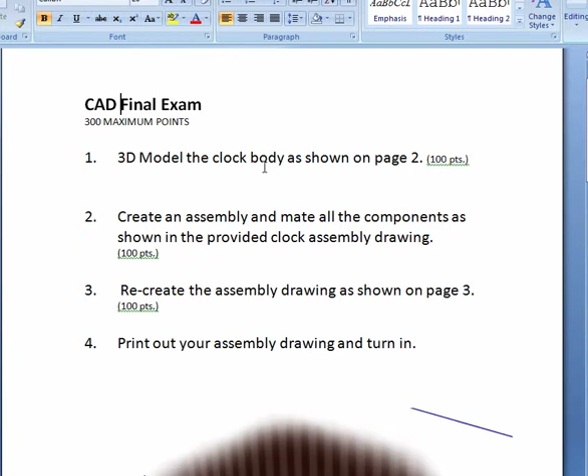This is our final exam. In this exam, basically there's four primary parts to it. The first part is to create a 3D model of a clock body. We'll see that on page 2 here. And you see all the dimensions are given in both manufacturing and engineering standard.

Once you're finished modeling the clock body, save it off. Then the second part is to create an assembly and mate all the components as shown in the clock body assembly drawing. So that's here. You see all the different components that are there. Everything from bolts and hands and all types of things. So anyhow,

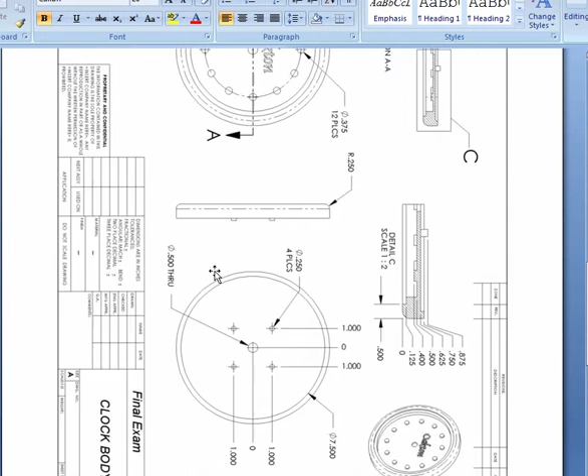then the third part is to recreate the assembly drawing as shown on page 3. So if we go to page 3, that's this drawing right here that we want to recreate. And finally print that out and turn it in. Don't forget your name. So let's get started.

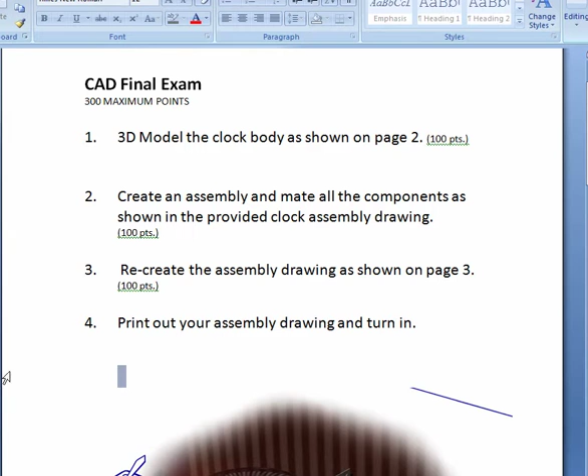With this, we'll first go ahead and start a new part file with ProE. And we could go ahead and select the front plane and start a sketch on it. We'll zoom up pretty close, select our circle tool, and in the drawing, the overall diameter for this is going to be 8 inches. If you take a look here, you can see 8 inches right there. And then there's going to be a thickness of 0.75, and then there's a radius on there as well.

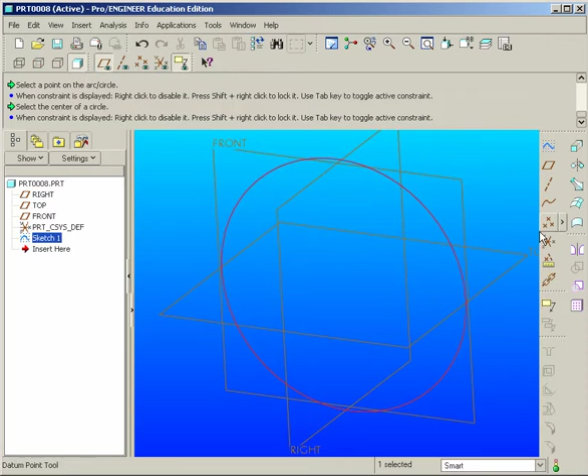So we'll extrude this. We hit done. We go to extrude, 0.75, hit enter 2 times. And it's probably not a bad idea to just put that radius on there, which is a round of 0.25. And select this edge. And now we know what the front is.

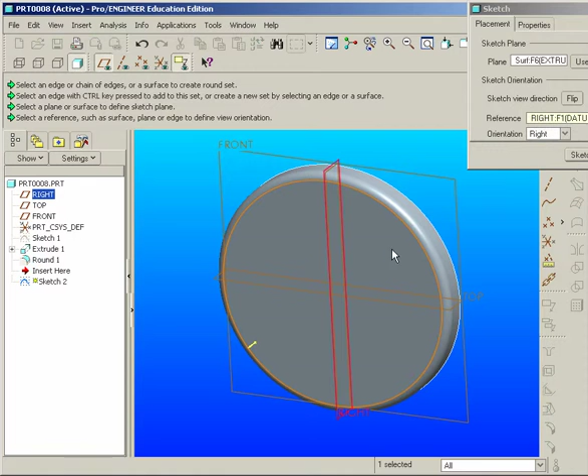We'll start a new sketch on that front surface. And this is going to be a recess, approximately 7 inches in diameter. And then that gets recessed. If we look at the drawing here, 0.125. So hit done, extrude, removing material. Don't forget to select the remove material button. You could flip the arrow and it's 0.125 and hit apply.

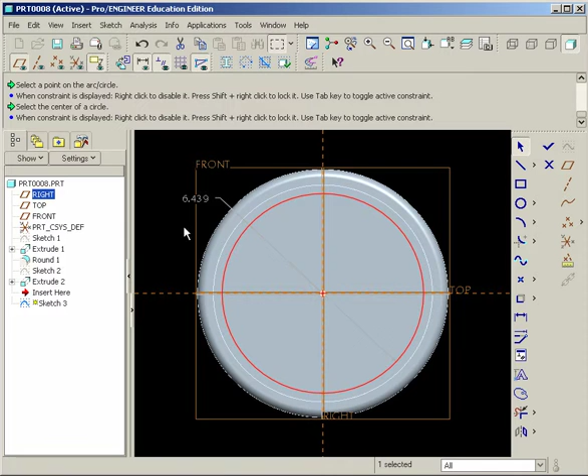Now we make another recess. We could select this face right here. Selecting the very front face, and you'll see there's a little bit of a benefit there. Eliminates us having to do any sort of math calculations, which might result in some sort of error in dimensioning. So this is going to be 6.5, and that's going to get extruded as well.

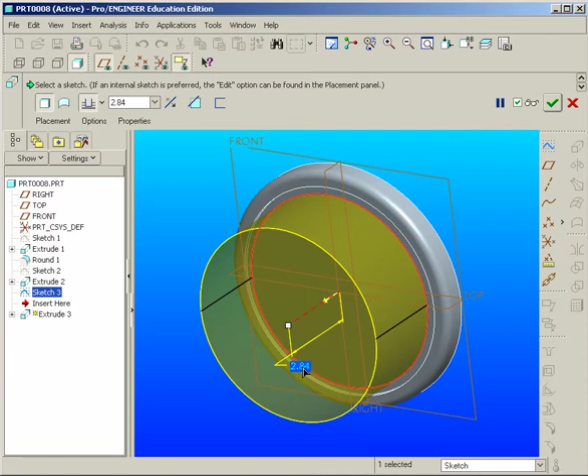If we look at the print, go from the 0 marker here, this goes all the way down to this line at the very bottom. If we follow that up, that's a 1/2 inch. So we'll set to 0.5 and flip the arrow. And make sure you hit remove material. Hit apply.

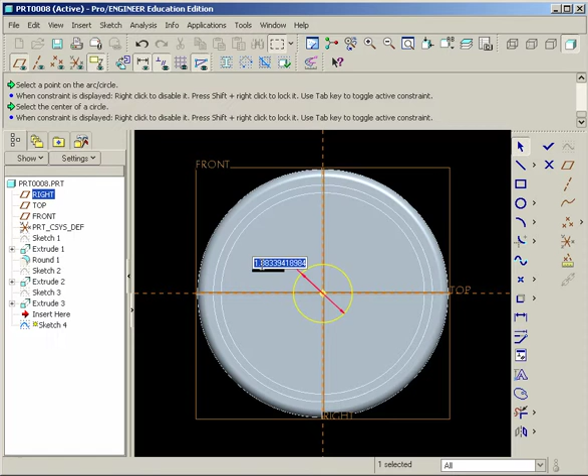Alright, there's also a through hole in here, so we could just select that face and start a sketch. And draw our through hole, which I believe is going to be just 0.5. And go to extrude, flip it, and cut it. And you can select through all.

Now the reverse side gets some features on it too, so we have to flip it around to the back. Start a sketch on it. And there's a circle that we have to draw. And it gets dimensioned here 7.5. And then that's a cut. So we go to extrude, flip the arrows, and that's 0.125.

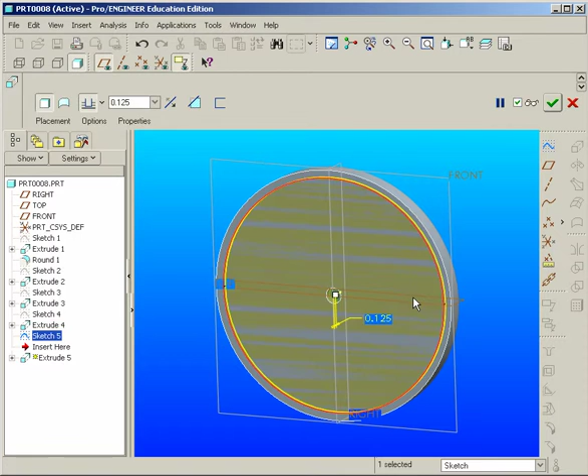And in this case, I didn't see anything update. As a matter of fact, it filled in my hole. Problem is I forgot to select the remove button. So if that happens, it's a very easy fix. Just right click on the feature, edit the definition, and select the remove material button. And there it is.

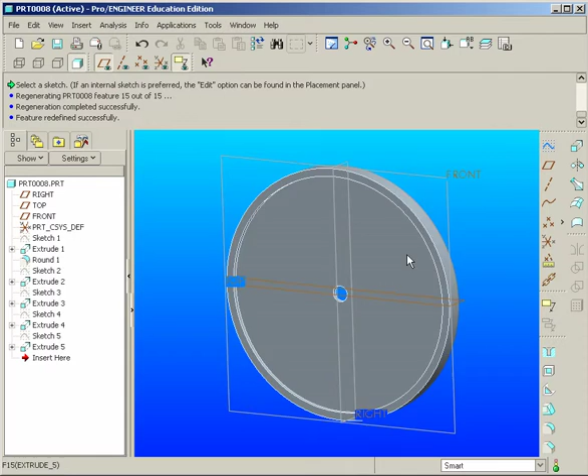Okay, we'll start putting some of the features on the back side here. We'll start a sketch on that surface, and we'll go to the centerline tool and just draw a vertical and a horizontal centerline. We'll take a circle tool, draw a circle out here. This is going to be 0.25 in diameter, and these are dimensioned 1 inch vertically and horizontally off of those center lines.

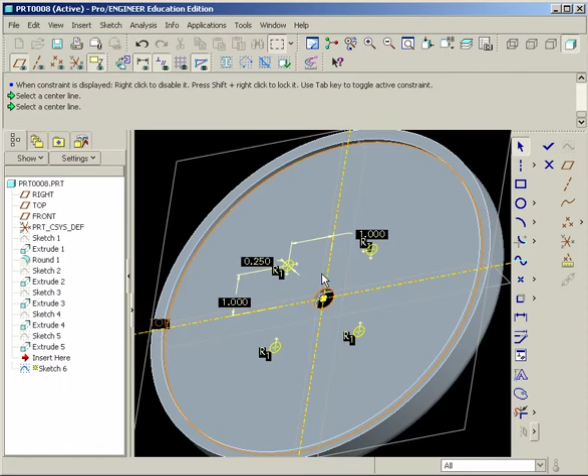And as long as you drew center lines in, which is right over here, make sure you select the center line, you should be able to do the mirror tool right now. So if you select the actual feature, over here on the lower right, you'll find the mirror. Select mirror and select the vertical center line, or horizontal for that matter, it doesn't really matter which order you go in. Now hold control and select both so they're red. Go to mirror again and select the opposite, perpendicular to that. And now you should have four circles, which we're going to create bosses from.

So we now go to extrude, 0.25, and the backside is done. Make sure you use the mirror tool for that. I'm going to be checking that one.

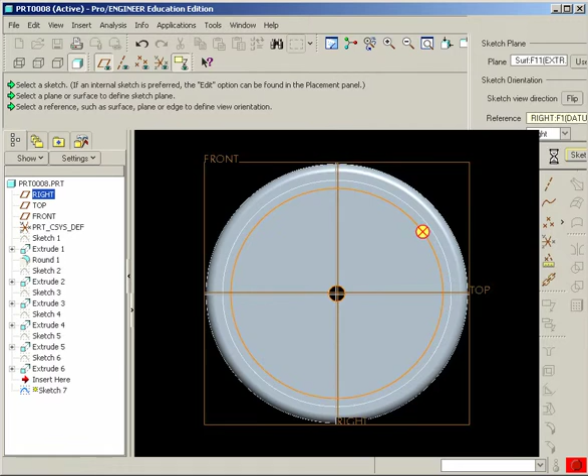Okay, now we'll select this face, start a sketch, and we're going to draw the 12 indicators on here. And diameter is 0.5, and it should be 2.5 for the location off of the center. If we look here, I have it shown as a diameter, which is 5 inches, so 2.5 would be the radius, which is half that.

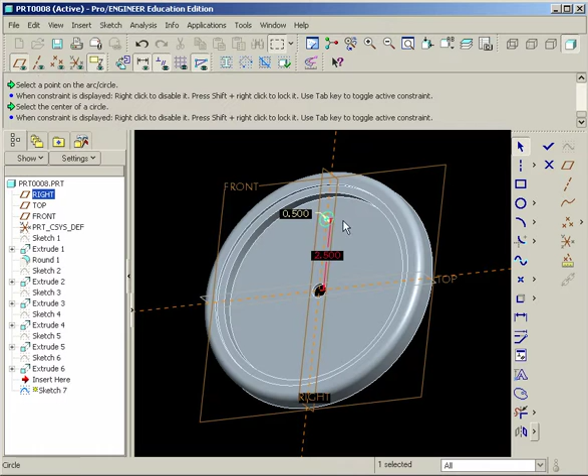And these are only 0.375 for the circles. My mistake. Let's change that. And now we'll hit done, extrude, 0.125. And now we need to pattern that with a circular pattern. The key to the circular pattern is this tool, the axis display. Make sure you also have your feature selected, like here, it's shown in red, and find the pattern tool.

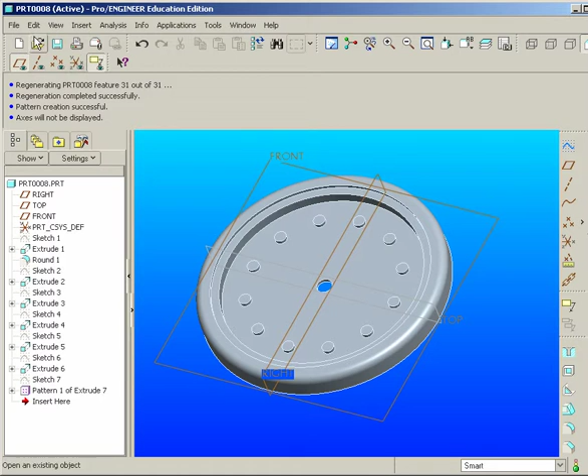Select axis, select the center axis right in the middle here, and be sure to put in 12 instances, and you can put in 360 divided by 12, which gives you 30 degrees, and hit apply. You could turn off the axis display. And there is our clock body, 100 points. We'll go ahead and we'll save that. And I'll save that as my, make sure you don't put any spaces in.

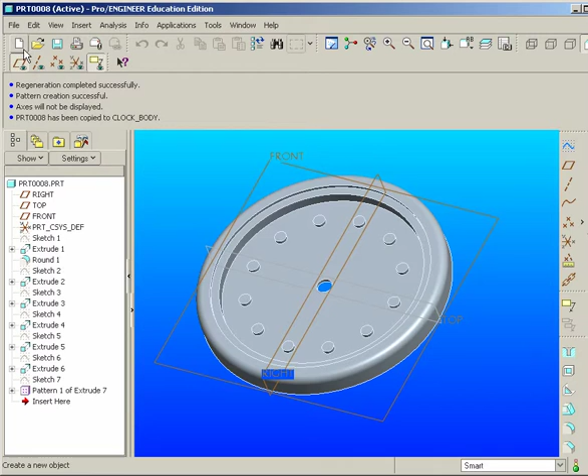Now we're ready to move on to the assembly. So let's go to New, Assembly, and we'll call this the clock assembly. Let me downsize it to the screen. You, of course, won't have to do this, most likely. All right, and we could go over here to insert a part. We go to Assemble. We find the clock body, hit open, and over here we'll go to the coordinate system and lock it in through that.

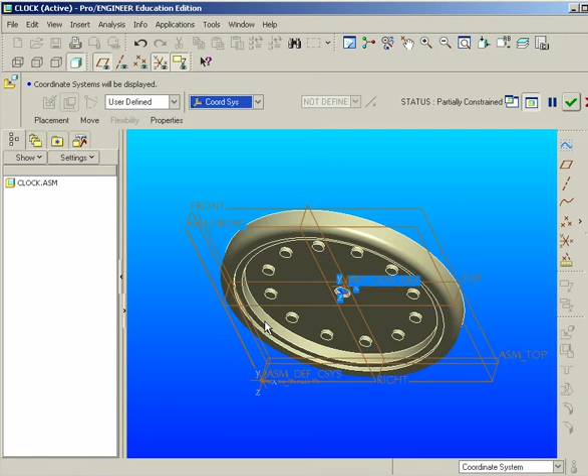So if we go to coordinates, we can now select the part coordinate system to the assembly coordinate system, or CSYS as it's shown. Hit apply. And we could begin to insert additional parts here. We could turn off our planes and even our coordinate system if we want, just so we could see this a little bit better.

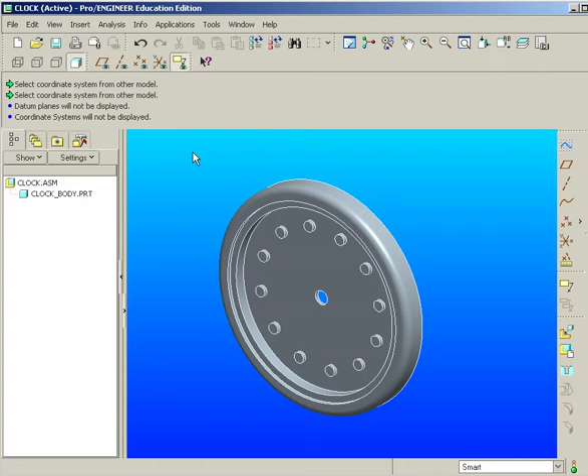And now to insert the new parts, go to Assemble, and it will be under your directory for your class. Go to Sample Files, and you'll find the final, and all the parts should be here. Next part you want to bring in probably is the chrono housing. Hit open, and we'll first get this face here aligned into the center hole.

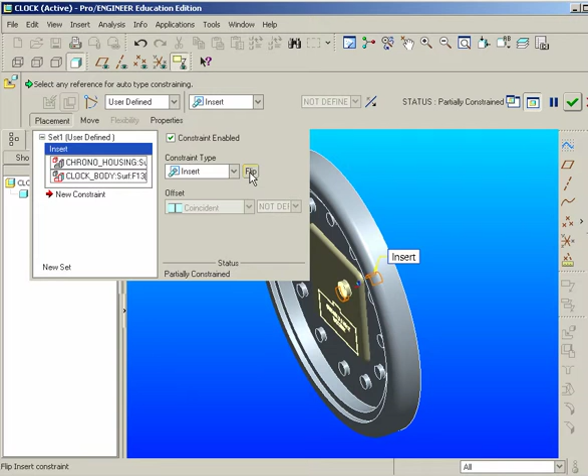Okay, we can see it's flipped around a bit. There's a nice little option here which will allow us to reverse that. We could actually go to placement here, and we could flip it. But the problem is with that, sometimes it flips it upside down. But that's okay. We'll go ahead and just leave it at that. We could actually middle click on it, and we'll go to Move Component. We can actually move it out a little bit if we want to see it better.

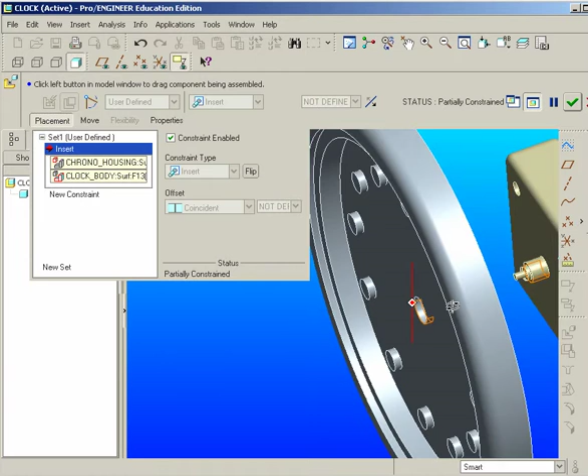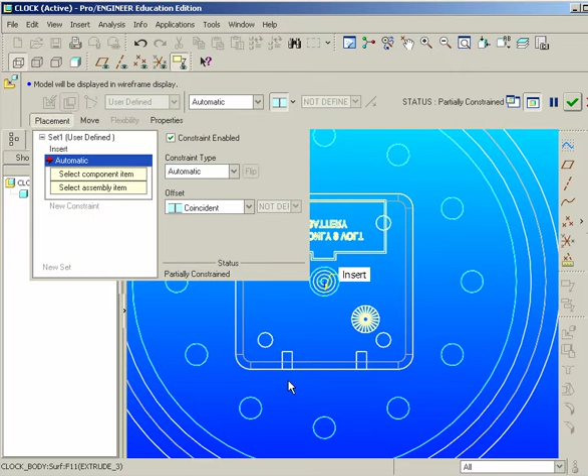And we'll go to New Constraint. And so basically right now, since it's upside down, the way we could tell that if we go over here to our views, go to the front view, and especially if you see it in wireframe, you should be able to identify that it has to be flipped the opposite way, because these little holes here are for the bracket for mounting it on the wall. So let's go back to shaded. We'll fix that in just a moment.

The way we could fix that is just to select the opposite holes. So we could select this hole here to this opposite end, and if it gives us a little bit of a problem with flipping it, and actually in this case it flipped it for us, we're in good shape. We'll go with one more new constraint. We'll select this face here to that face and hit done.

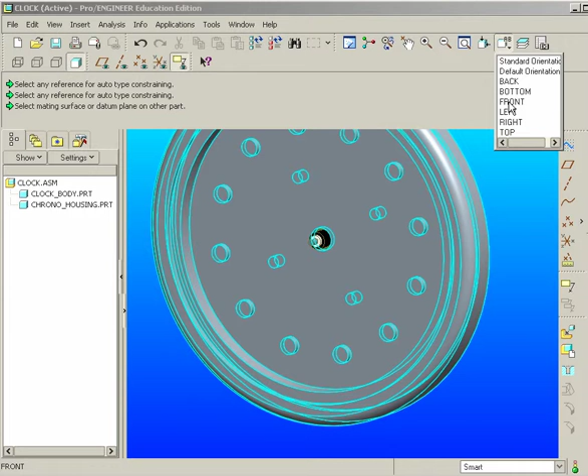And now if we go to the front view orientation under the AB button here and change it to wireframe, we should be able to see that those two holes there for the bolts are going to be on the top, which is what we need.

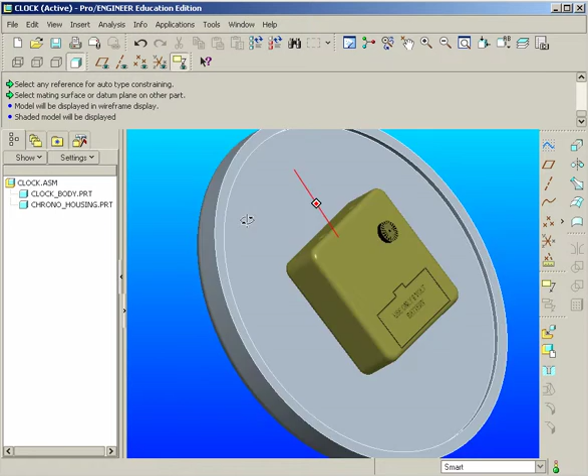Okay, we'll go back to shaded mode. Now we'll go ahead and insert some of the additional parts here. So we go over here to Assemble, and we'll go ahead and drop in the hour hand. And here we can see it. We'll select this face here, and that gets mounted to the white surface.

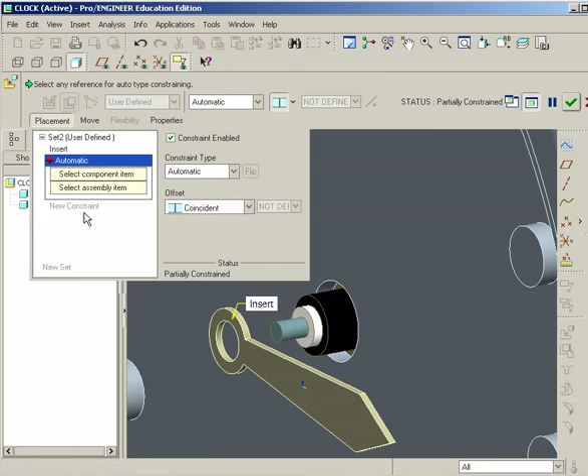Okay. And unfortunately, it's way over here, flipped on the other side. So that's not a problem. If you want to move it, just right-click over it, and you'll find Move Component. And now you could grab it and just move it forward, and click to drop it with the left mouse button. Go to Placement now, and go to New Constraint, and we'll go ahead and select it to be mounted.

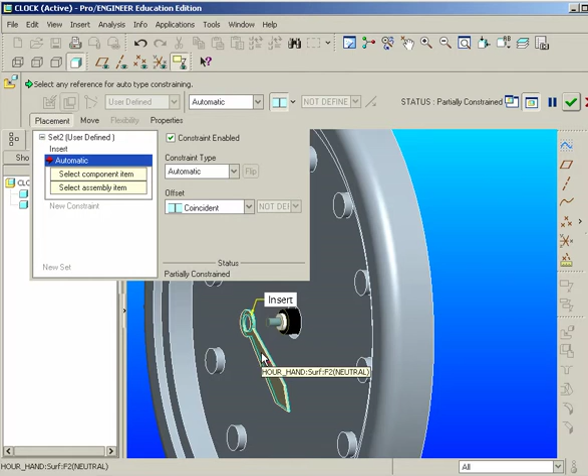Let's see here. Flip it around. And we might have to move it a little bit more. Right click, or we could right click and it'll select the backside face for us just by hitting next. And then left click. And then select the black surface here. And that's it. Hit apply. If it moves, that's okay.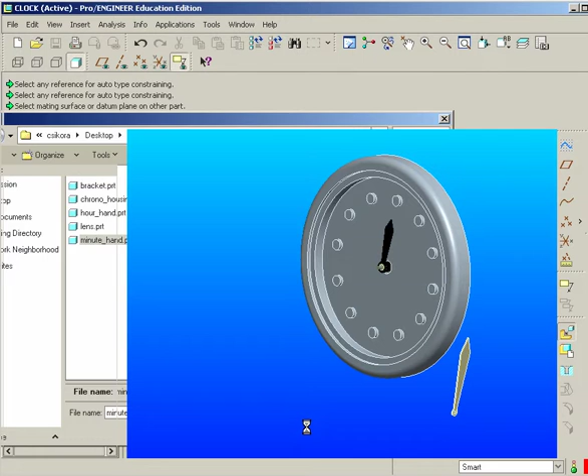Alright, we'll go ahead and insert another part here. So this time we'll drop in the minute hand. And let's right click on it and move it right in the front, closer to where we want it, so we won't have that same issue. We could go to Placement, select this face here, to the silver face, and as you can see, it's a little bit easier this time. We could actually flip it around, select that backside face, rotate it, and select the white surface here to mount it.

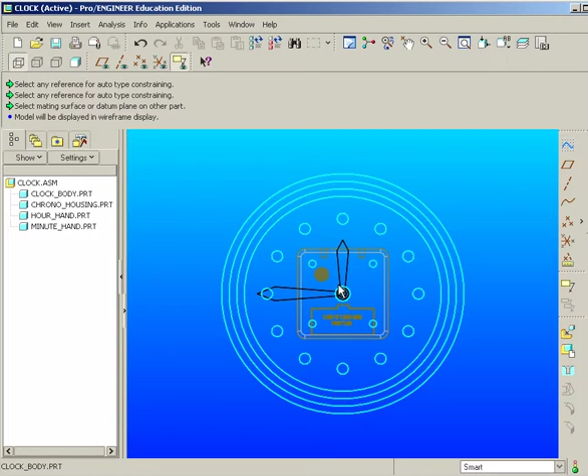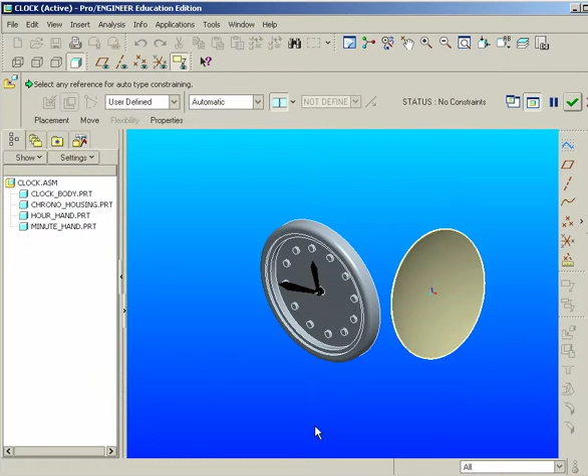We'll put the lens in. And to put the lens in, we just go over here to Assemble, and we select the lens. Again, right click over it, and you'll find Move Component. Let's bring it way over here. Click with the left mouse button.

And then go to Placement, select that flat face there. There's a little flat. And you want to mount that on this face here. And then you can select the cylindrical face there and mount it on that cylindrical face and hit apply.

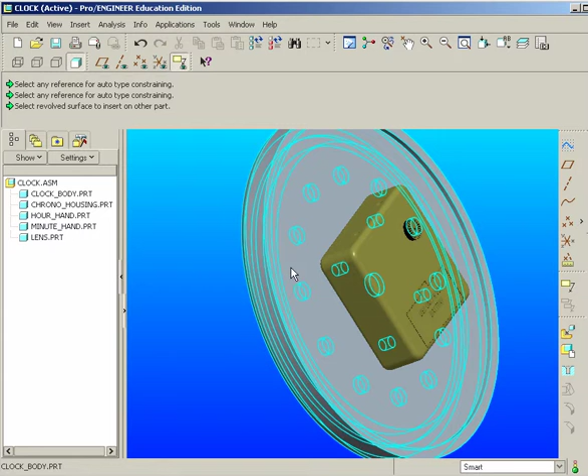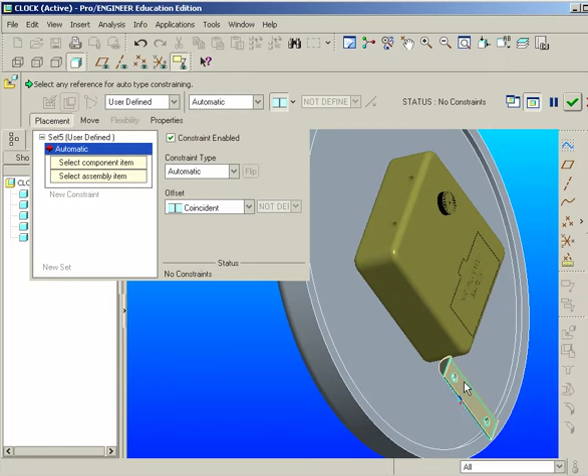Okay, now we just have to put the bracket on with the bolts. So we go to Insert and select the bracket, hit Open. The bracket's over here. Again, it's not a bad idea to right click on it, move component, and drag it over here. Go to Placement, and now, actually let's bring it up a little bit. Right click on it, move component. Let's move it up closer where we want it.

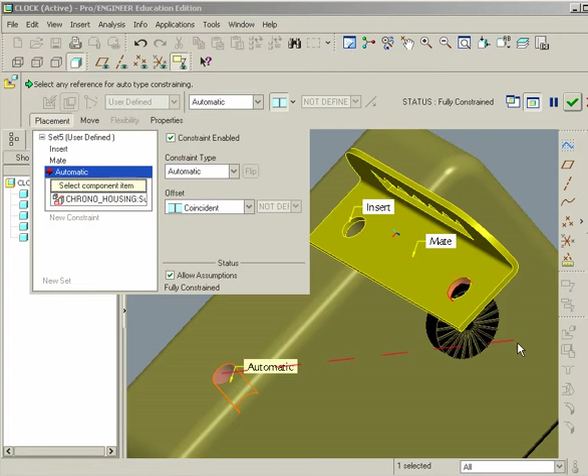And then click on the Select Component here. We'll select this hole. Let's see, it's the backside face, so we want it actually on this hole right here. Okay. And then we'll select this underside face to lock it into this face. And then we could actually mate up the holes again over here. Oh, I should have actually selected new constraint. Let's try it here. And apply.

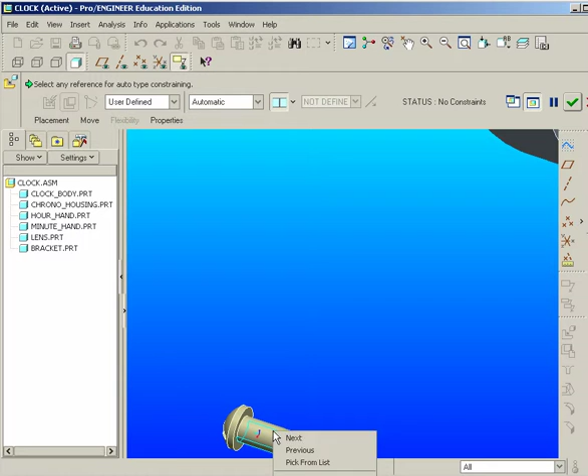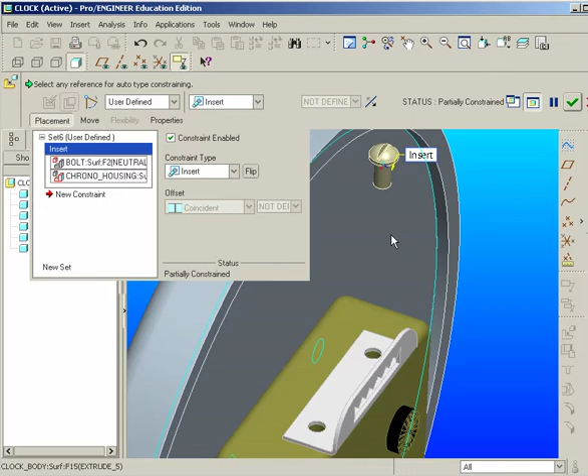All right, and finally, the bolts. Bring in one, and we'll right click on it to move the component. Grab it with the left mouse button, bring it closer where you might want it. Actually, we could drag it up further. And we'll go to Placement, click in the box, select the length of the shaft here to one of the holes, and then flip it around, select the underside face to the top face of the bracket. Hit Apply or middle click.

Let's bring in another one. Again, bolt. And it's remembering our last mates. It's supposed to be a nice feature. For our class, let's just go to manual here, place manually to override that. It's like an automatic feature. It's supposed to make things work a little bit faster, but let's skip it.

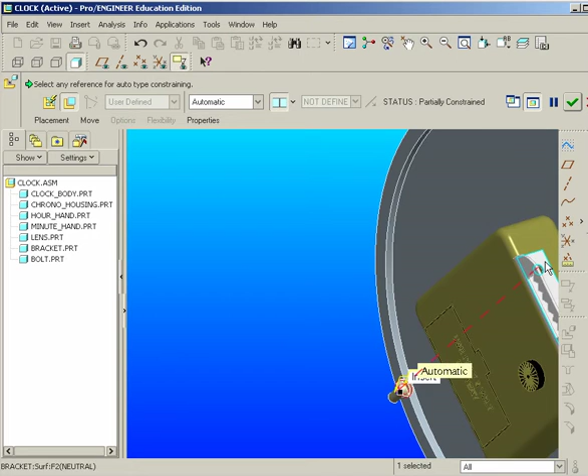And we'll go over here, select that, and then select this underside face. We'll have it go right through the part to grab the top face of that bracket and hit apply. Okay, that's it. We'll go ahead and save that off.

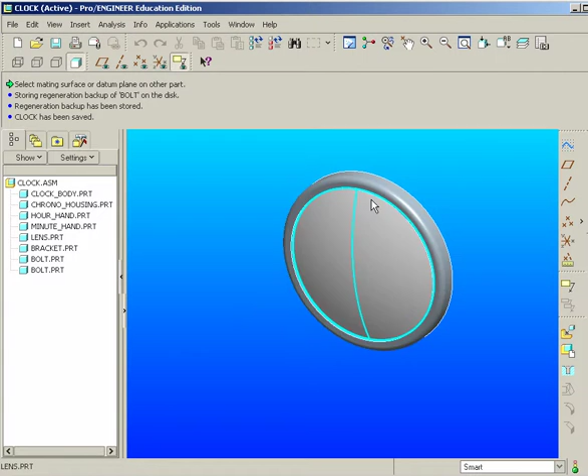And now we're going to explode it. So we could go to View, Explode, and Edit Position. Now it's going to automatically explode it partially for us. We might want to actually add to it a little bit, enhance how it's laid out a little bit better. And the way you can do this is you can select the component. And if we turn on axes, it might be easier. We could actually select an axis.

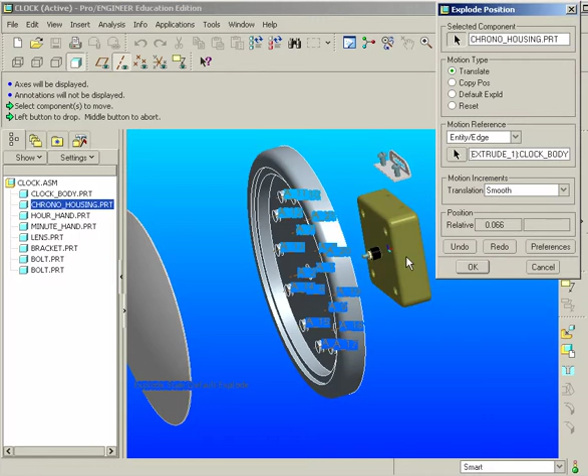In this case, the center axis does pretty well. And then we select the component that we want to move. So if we want to move this, just click on it, drag it out the back, and then we could hit OK. And actually, we should go back there. Go back to View, Explode, Edit Position, and let's move some more of these.

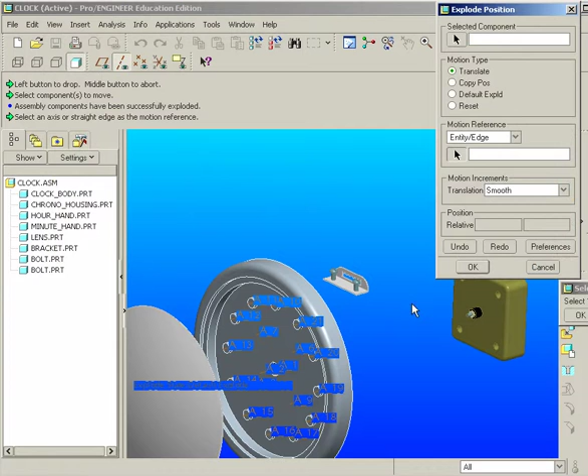So Motion Reference. We could go ahead and select that axis, select the part that we want to move, and you could actually put incremental values in here if you're watching it. In this class, I'm going to let you kind of eyeball it, but in real life, you might want to actually put an incremental value. Like if this moves 7 inches, make sure that the bolts move 7 inches so they're all in alignment properly. So we're at 7.42.

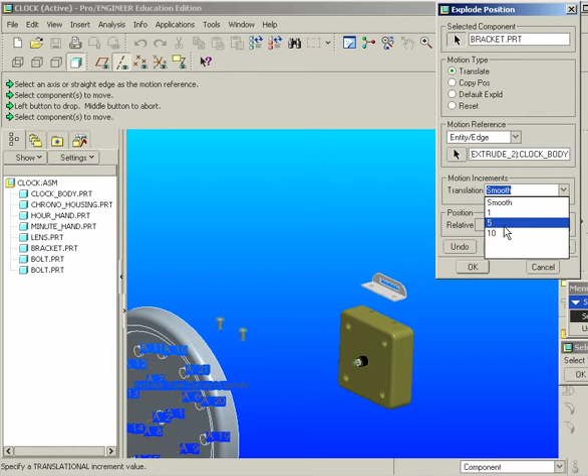And we could go ahead and over here, instead of smooth, we could put in specific values too. So we could go to five, hit OK. And we could go ahead and do the rest. So let's keep going with that. View, Explode, Edit Position.

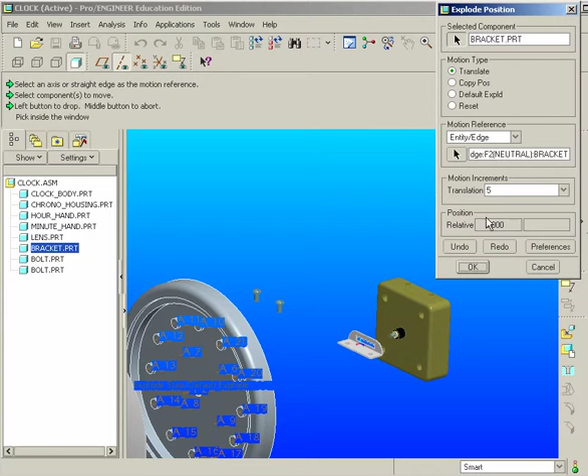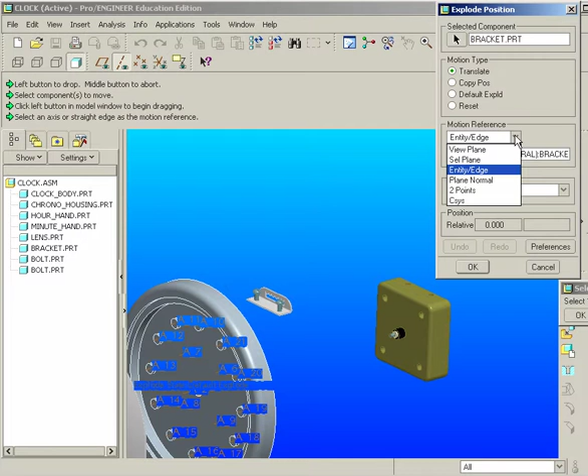Okay. And for this, again, we'll go ahead and make sure we select the right things. So translational or motion increment, we'll select the component. And actually, we'll just do smooth here. Move back. All right, I'm having a little bit of a challenge here with it. Apparently my motion reference, I have it set to something that I didn't want. So let's go ahead and make sure we have it set to one of these axes.

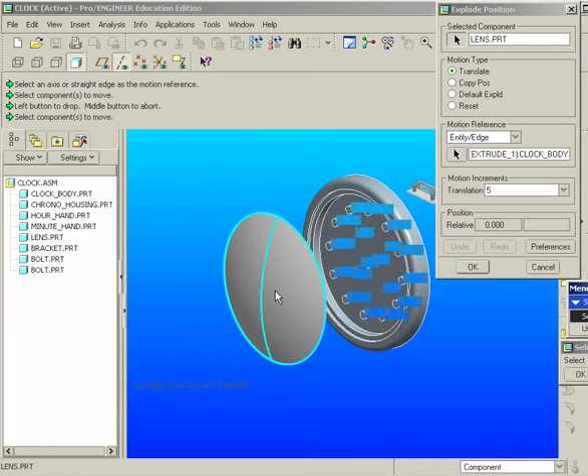And we could go ahead and move it. And here it's incremental. This is more what you want to do. Like we'll click on 10 inches for that. So basically, you just keep going through there. We'll do one more. Go to View, Explode, Edit Position. And we'll grab another axis. And then the component, let's move this forward. Okay.

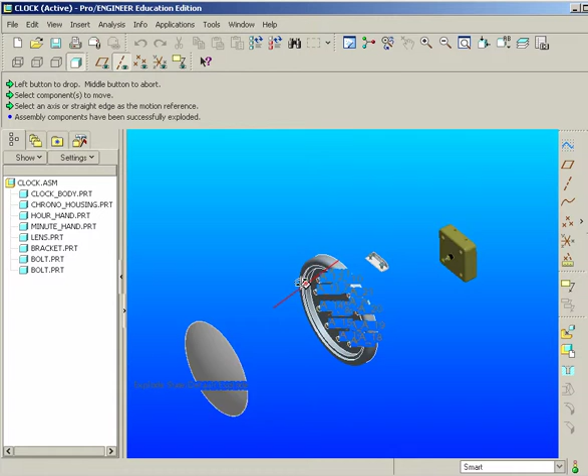And now we'll go ahead, and I'll actually have to work on this a little bit better. Actually, let's collapse it. Go to View, Explode, Unexplode View. This will bring it back if it disappears. You can turn off your axes. And now let's move on to the drawing.

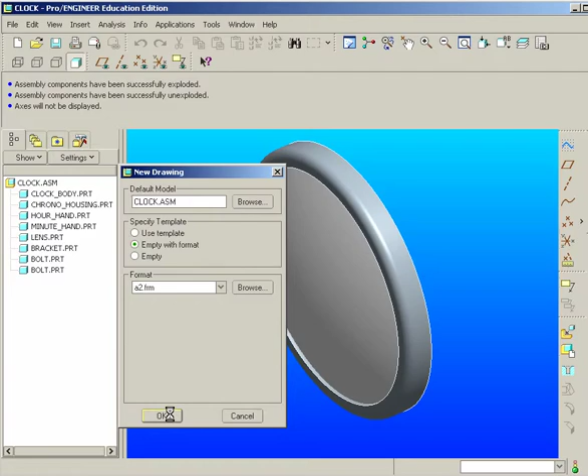So go to New, Drawing, turn off Use Default, Empty with Format. Make sure the clock assembly is selected. If not, hit Browse, find it. Go to Browse. We'll use the A size. Unfortunately, I don't have an A standard here. Maybe we could use this one. A2 sounds like it's an ISO template, but it should be okay. Hit OK. Your templates are a little different on your computer. Just select the A size and that'll be fine. Doesn't have to look just like mine.

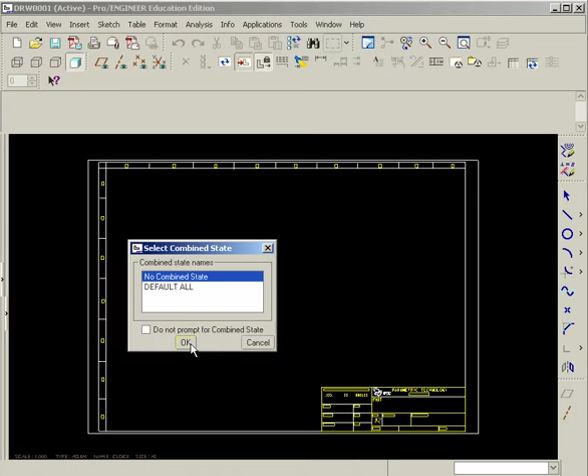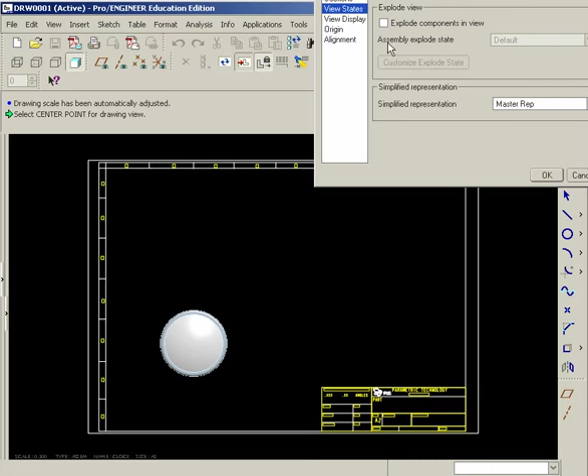Okay, now I could go ahead and click on this icon here to insert a general view. Left click. I'm going to go to the front view orientation. If we look at the actual print, you have to try and match this as close as possible. You'll see that hidden lines are visible. So under View Display, make sure we have center lines set for tangent edges and hidden lines are visible. Hit Apply. And then we're going to hit Close and we'll move this. So be sure to unlock it, relocate it.

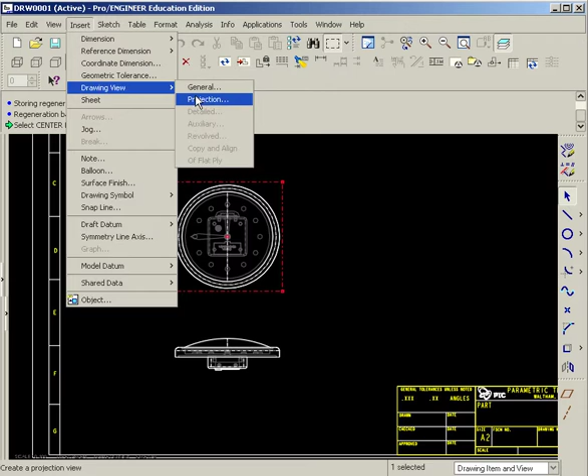And we'll go to Insert, Drawing View, Projection. Have a bottom view. Double click on that. Make sure under View Display, that one will be hidden lines as well, and center lines. And then we'll make another one. Select this view, go to Insert, Drawing View, Projection, make a left side. Under View Display, same thing. Hidden lines, center line, hit OK.

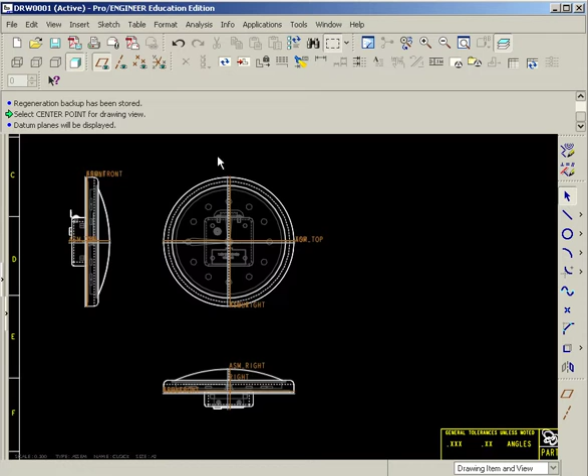Now we need to make a section view. So for the section view, as long as you lined everything up in the center, we should be able to turn on our planes and see our assembly right plane. So now we could go to Insert, Drawing View, Projection, select our front view, drag off one to the right, double click, and over here under Section, select 2D cross section, hit the plus symbol, hit Enter, give it a name A, hit Enter again, and I'll just select the assembly right plane and hit OK.

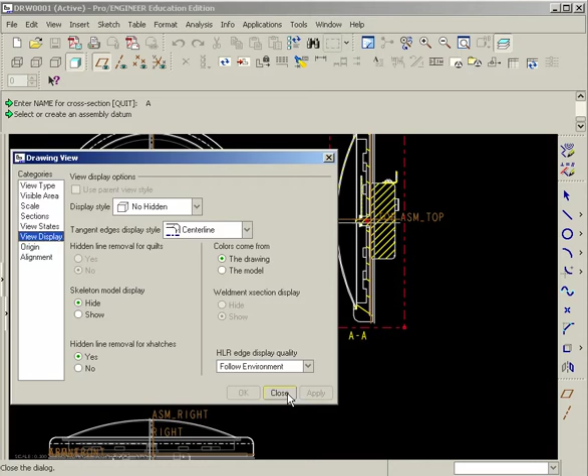Now for this one, be sure that you have it set up and it should look exactly like the print. That means that under View Display, we want no hidden lines and center lines for the tangent edge display. And you could turn off your planes again. So it should look just like that. If I see hidden lines, it gets marked off.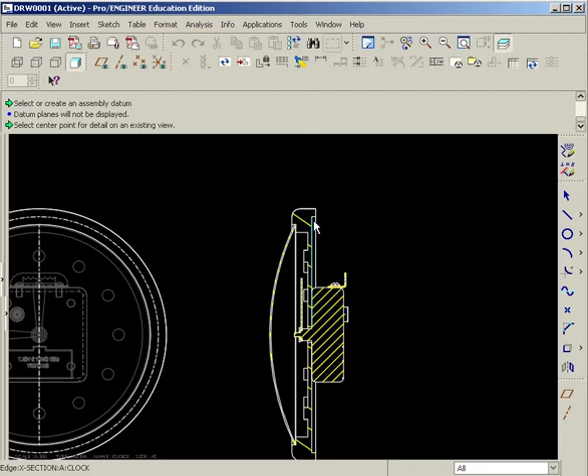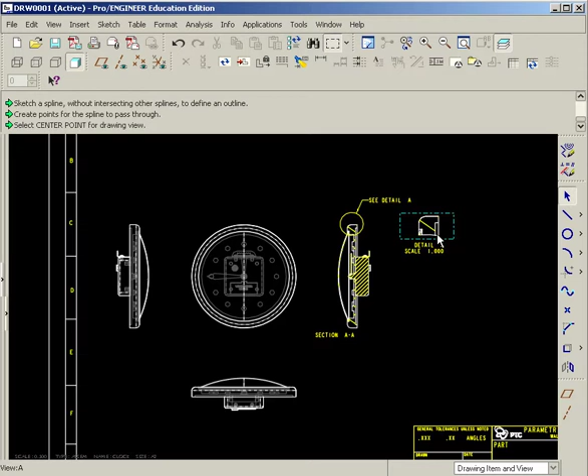Okay, the next view is a detail view. So we go to Insert, Drawing View, Detail View. Make sure no view is selected before you do this, or else it'll be grayed out. Click in this vicinity here, and then drag a circle around it. Middle click, left click to drop it. Make sure that you lay this out nicely and align the detail view information as such. Okay, we might have to squeeze some of that together so we can make room for our isometric view. So make sure you drag some of these things over.

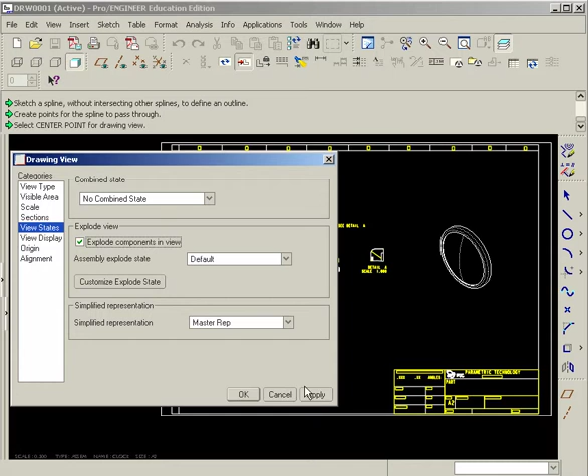Now for the isometric view, we'll right click the area, insert general view, hit OK, left click to drop it in. Make sure this is set to isometric, hit apply. Under view display, make sure no hidden lines are turned on. You want center lines for the tangent edges, hit apply. Finally, go to view state and explode, hit apply, and close.

Now it didn't seem to remember what I had. That's okay, just use what we have here. We'll go into more detail with exploding next class. It's just a little too complex right now for an introductory class.

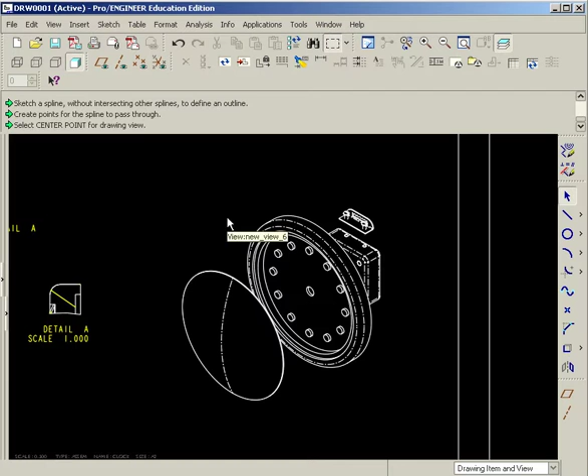So at this point we're going to insert the balloons. We'll go to Insert Balloons and do it the manual method. The next level class covers how to do this automatically, just a little more than I want to cover right now. But we'll hit with leader, make note.

From here we could select an edge of the part we want, middle click. This will be the bracket, part 1. Hit enter. Hit make note, click on this part, middle click, make that part 2, hit enter.

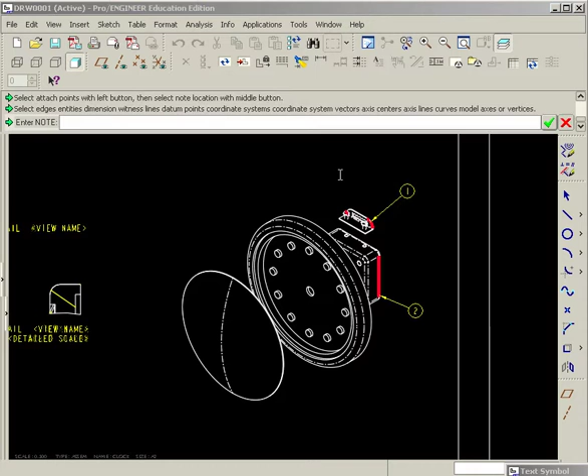Make note, we'll select one of the bolts, middle click, that'll be part 3, hit enter. Hit make note again, select the clock bezel, middle click, that will be part 4, hit enter twice. Make note, select the edge of the lens, middle click, that'll be part 5, hit enter.

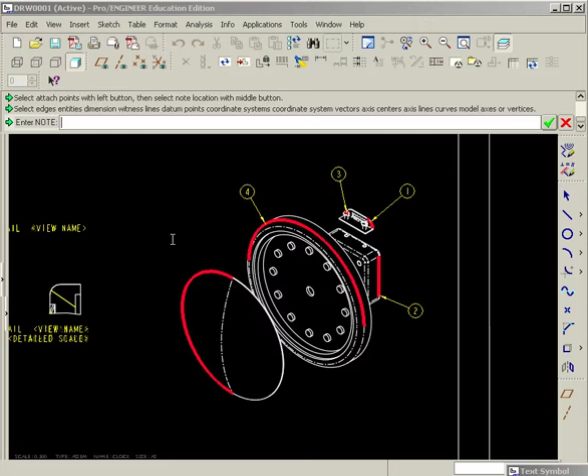And the hands aren't showing up because they're behind the clock bezel. That's okay, just hit done and return.

Okay, from here now we're going to drop in our bill of materials. Again, we're not going to use the automatic method. We'll go over here to table.

Select here, will be 5 by 12 by 5, middle click, 1, 2, 3, 4, 5, 6. Oh, should have put something in there. Let me hit cancel, and hit quit. We'll put those in again. I went a little too fast.

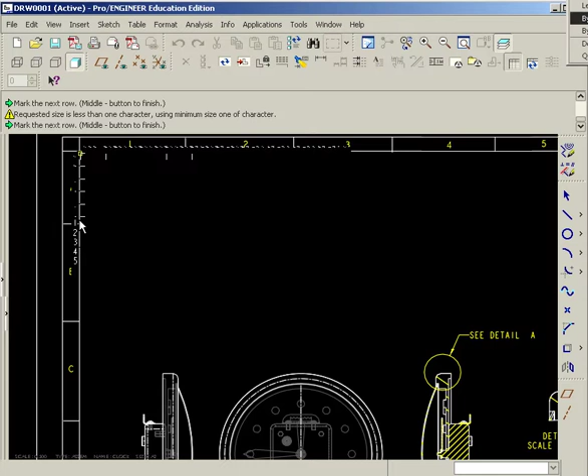So left click, 5, 12, 5, middle click, 1, 2, 3, 4, 5, 6. Then the first cell we'll make it part. Second cell will be description. Third cell will be quantity, QTY, period.

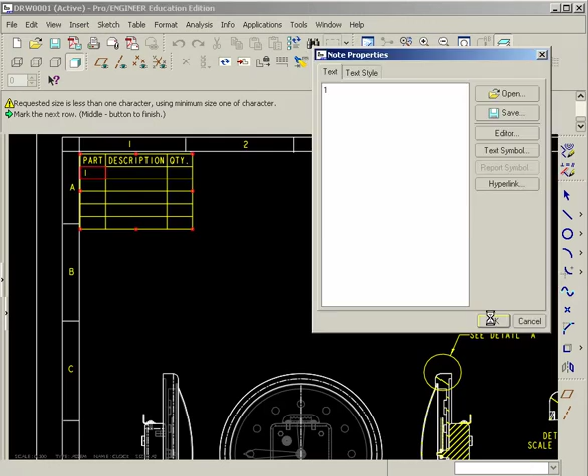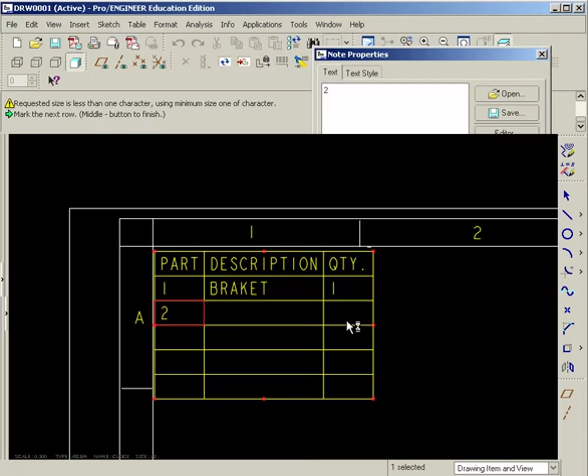First part here is number 1, and if we look at that part, that was the bracket, and quantity of 1. The next thing was number 2, that's the chrono, so we'll double click in there, type in 2. Just call it the chrono housing, I didn't make enough room to put all that in there. That'll be a quantity of 1.

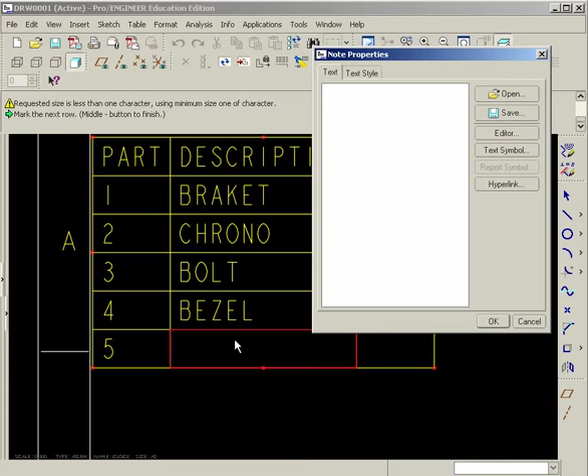Number 3, I believe, is the bolt, and that has a quantity of 2. Number 4, we can middle click, actually move over here, it takes too long there. So for number 4, that's the actual clock bezel, quantity of 1. And number 5 is the lens, quantity of 1.

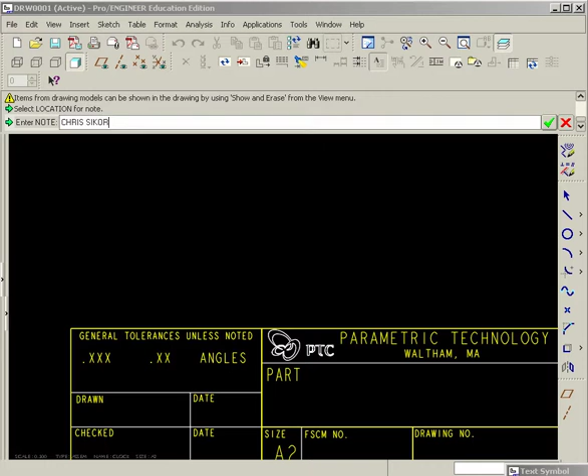Make sure you drop your name in. So you go to Note, Make Note, left click, hit Enter, done, and you're done.

And that is about it. Let's make sure that we have everything in here. Oh, one other thing, make sure you show the arrows for the section. So click on this view here, right click, then first left click so it turns red. Then right mouse button click and you'll find add arrows. Select the view you want to add the arrows to, and maybe squeeze those in a little bit.

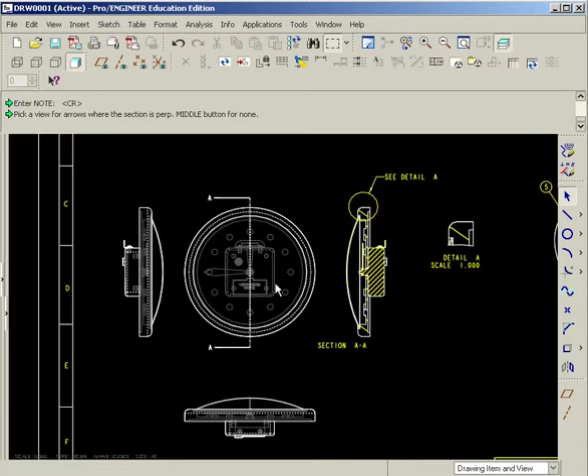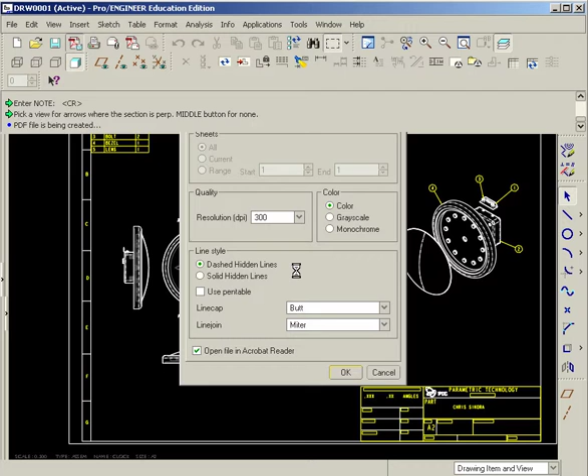And that is it. Go to print, actually don't go print, go to save as PDF. Hit OK with the default settings. Once it comes up, just use the print out of the PDF viewer. So right here, you just hit print and it should print out. Turn it in, make sure your name's on it, double check that, and that's it.